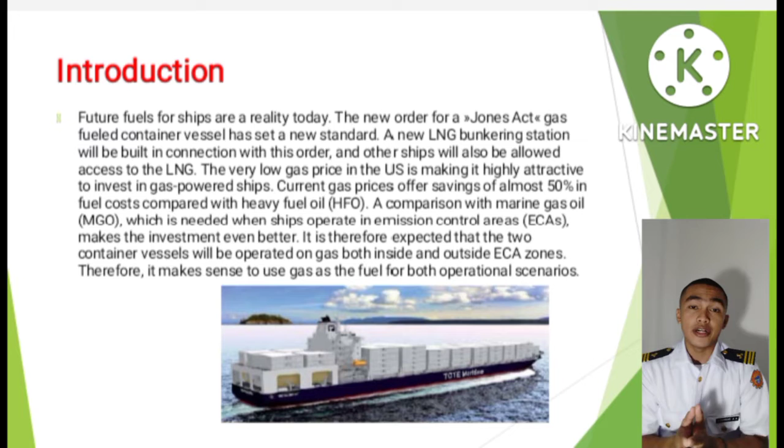So to conclude, it would make sense to use gas fuel in both operational scenarios. It minimizes operating costs with an upgraded MAN B&W ME-GI.

The upgraded MAN B&W ME-GI, as a two-stroke dual-fuel LNG engine, improves one of the industry's most trusted platforms to deliver even greater operational efficiency for large merchant marine vessels.

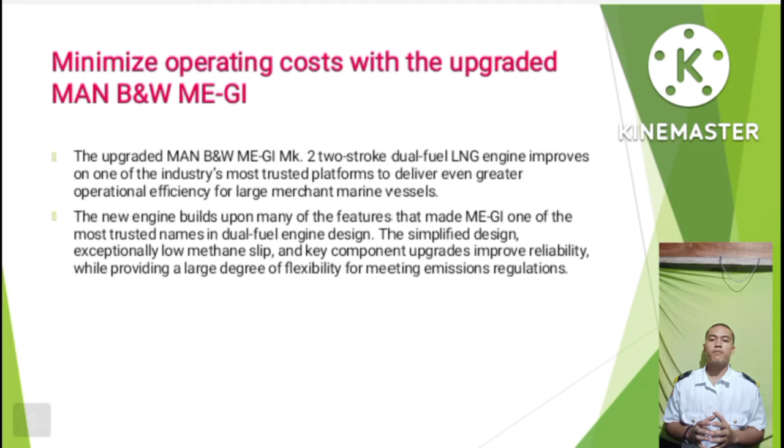The new engine builds upon many of the features that made the ME-GI one of the most trusted names in dual-fuel engine design. The simplified design, exceptionally low methane slip, and key component upgrades improve reliability while providing a large degree of flexibility for meeting emissions regulations.

Built for low OPEX operating expenses, so perfect for new builds or retrofits.

The MAN B&W ME-GI minimizes operating costs by delivering the same industry-leading thermal efficiency no matter which fuel you are using. This is a huge advantage, especially for container vessels in a market where fuel prices are fluctuating and LNG bunkering will become the norm.

Because of the MAN B&W ME-GI, capex is lowered as auxiliary equipment costs have been reduced. The engine's installation is also simplified.

In addition, key components have been updated to improve performance and deliver a more environmentally friendly solution.

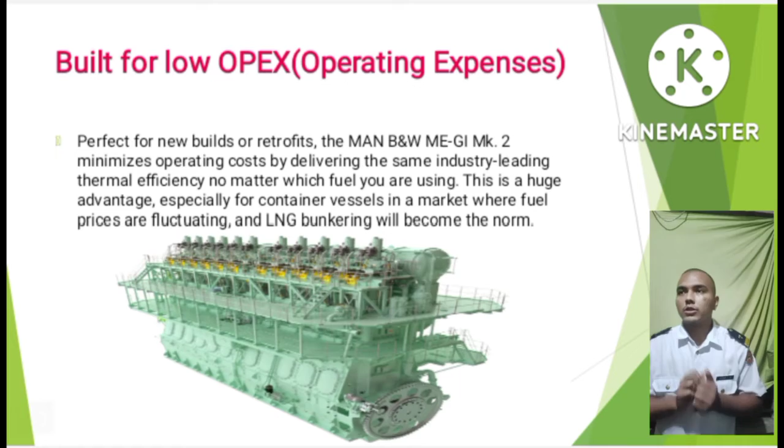Dual fuel operation requires the injection of both pilot fuel and gas fuel into the combustion chamber. So why dual fuel? This system ensures reliable ignition and outstanding combustion of gas and air mixtures with specific high performance. The gas is a low-cost fuel that ensures extremely efficient engine performance and also reduces nitrogen oxide emissions.

Different types of valves are used for this purpose. Two are fitted for gas injection and two for pilot fuel.

The auxiliary medium required for both fuel and gas operation is as follows. First, high pressure gas supply. Why do we need a high pressure gas supply in a dual injector system? The higher pressure allows an increase of the flow rate per unit area, thus permitting smaller and lighter injectors with faster actuation for enhanced injector shaping capabilities.

Next is the fuel oil supply, or the pilot oil. In the dual fuel combustion process, the ignition of the main fuel plays a crucial role in engine performance and emissions. In the present work, pilot fuel is used to ignite a gaseous methane air mixture.

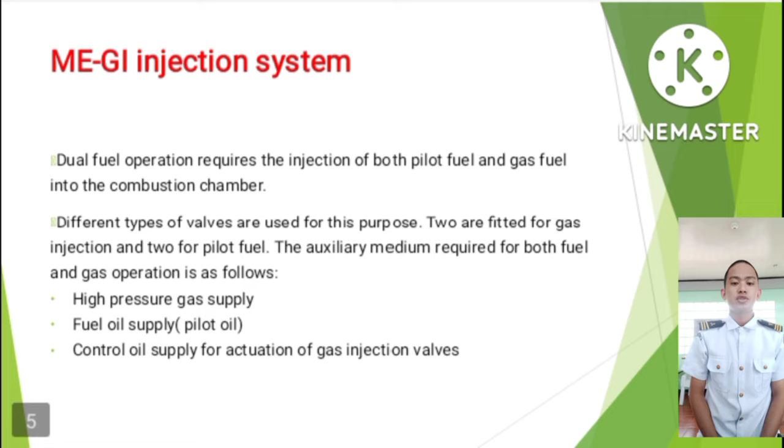The gas injection valve is shown in figure 8. This valve complies with traditional design principles of the compact design. Gas is admitted to the gas injection valve through bores in the cylinder cover.

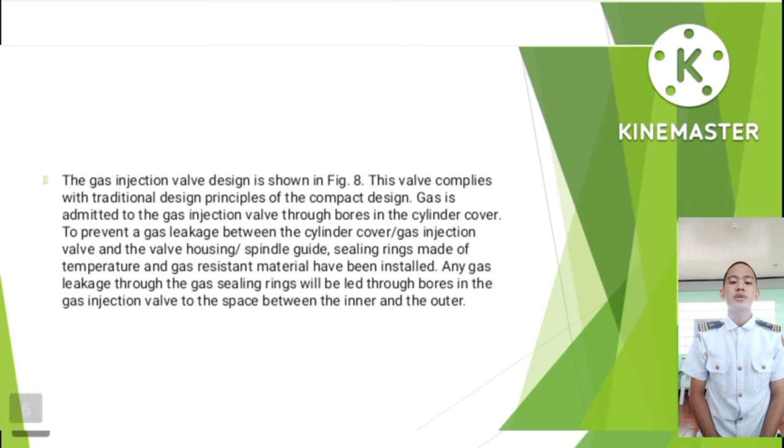To prevent gas leakage between the cylinder cover or gas injection valve and the valve housing or the spindle guide, sealing rings made of temperature and gas resistant material have been installed. Any gas leakage through the gas sealings will be led through bores in the gas injection valve to the space between the inner and outer. Next is the safety features.

The MAN B&W ME-GI engine is equipped with an additional safety system that ensures safe operation on gas without requiring a rupture disc in the scavenge air receiver, the exhaust gas receiver, and the exhaust gas piping.

Under normal operation, where no malfunctioning of the fuel oil valve is found, the gas valve is open at the correct crank angle position and gas is then injected.

The gas is supplied directly into an ongoing combustion. Consequently, the risk of having unburned gas that might slip past the piston ring and into the scavenge air receiver is considered to be unlikely. Monitoring of the scavenge air receiver pressure and the combustion condition also safeguards against such a situation.

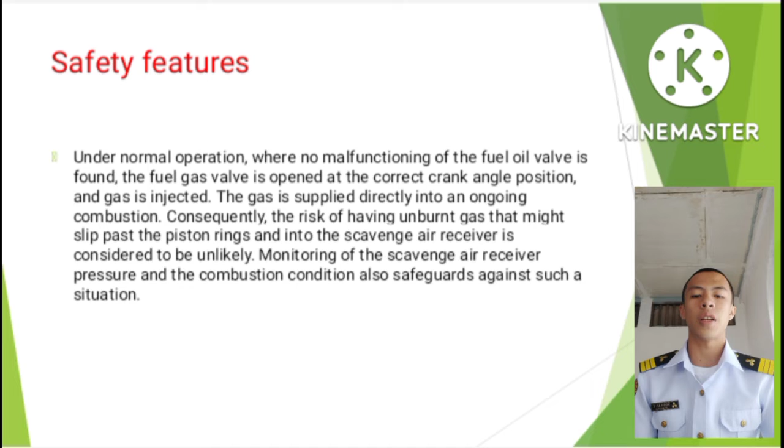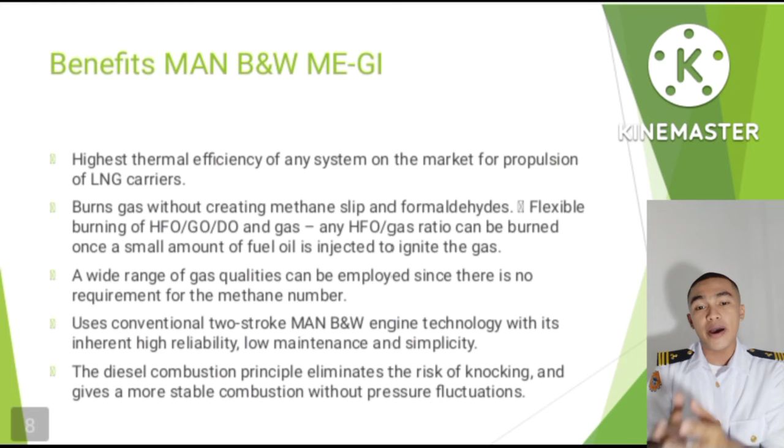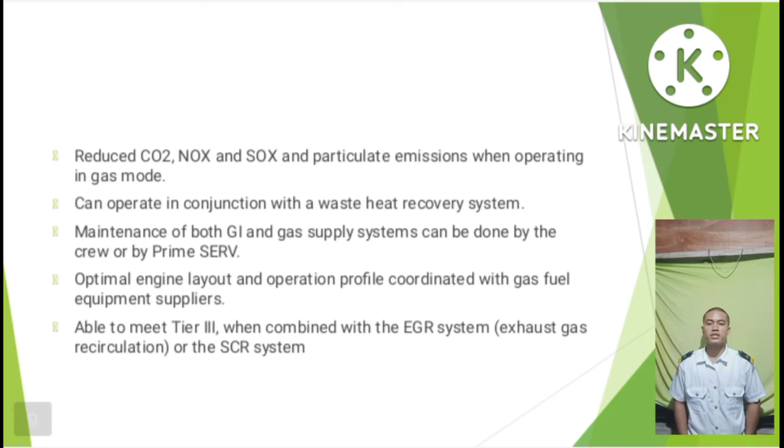Benefits of the MAN B&W ME-GI engine: it reduces CO2, NOx, SOx, and particulate emissions when operating in gas mode. It can operate in conjunction with a waste heat recovery system. Maintenance of both GI and gas supply systems can be done by the crew or PrimeServ. Optimal engine layout and operation profile are coordinated with gas fuel equipment suppliers, and it's able to meet Tier 3 when combined with the EGR system, exhaust gas recirculation, or the SCR system.

So introducing the upgraded MAN B&W ME-GI, a two-stroke dual fuel engine. This is the new MAN B&W ME-GI Mark 2 engine, a dual fuel gas optimized engine.

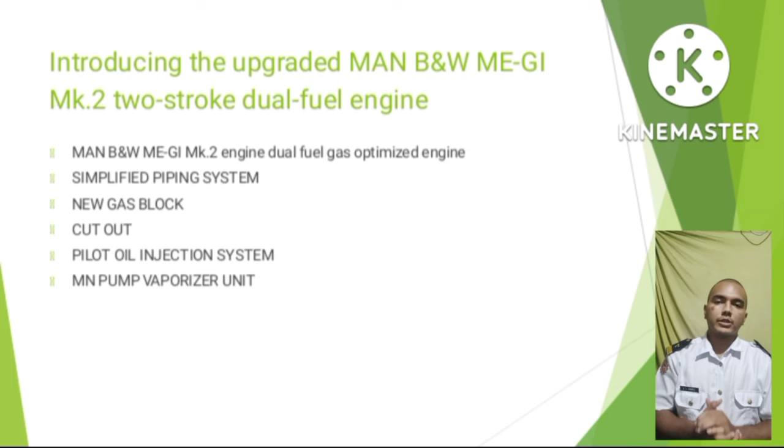Next is the simplified piping system, the new gas block, cutout, pilot oil injection system, and the MAN pump vaporizer unit. In these parts, we are going to explain and show the picture.

So the MAN B&W ME-GI engine is a dual fuel gas optimized engine. In that picture, it has an optimized engine that obtains considerable reduction of fuel consumption in gas mode by means of dual fuel gas optimization, like dedicated performance tuning, and this will be standard for the 70, 80, 90, and 95 bore versions.

So the upgraded MAN B&W ME-GI, the two-stroke dual fuel LNG engine, improves one of the industry's most trusted platforms, delivering even greater operational efficiency for large merchant marine vessels. The new engine builds upon many of the features that made the ME-GI one of the most trusted names in dual fuel engine design, including simplified design, exceptionally low methane slip, and key component upgrades that improve reliability, providing a large degree of flexibility for meeting emissions regulations.

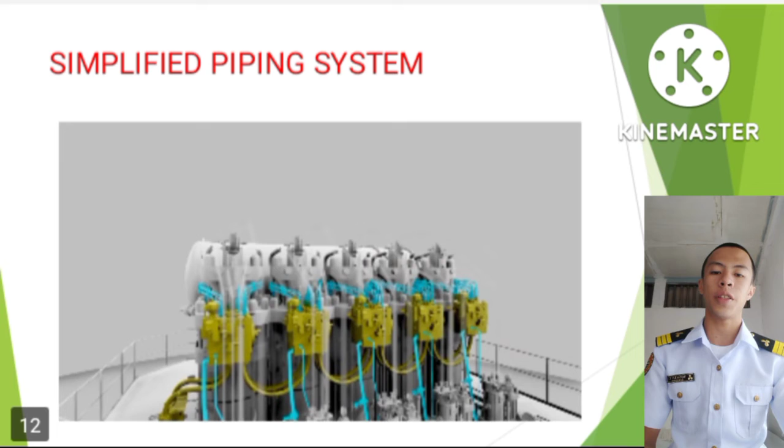So the next one is the simplified piping system. Simplified installation is achieved by removal of purge and blow-off valves and integration of sealing and hydraulic activation oil pipes in the cylinder cover. The gas chain pipes of the Mark 1 version are replaced by a one-way flow system for the gas.

Nitrogen purging function is enabled through a newly developed on-engine mounted nitrogen block. At the same time, the gas accumulator design has been further optimized to achieve a more compact solution with fewer components for the piping system, which also causes maintenance to be lowered.

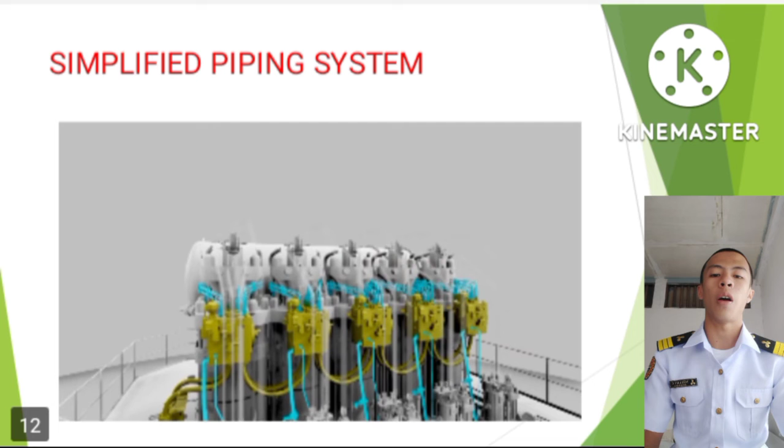The new gas block has brand new features for two-stroke dual fuel engines. The new MAN B&W ME-GI Mark 2 gas block design with improved window valves involves cutout of single cylinders operating on gas while allowing continued operation on fuel oil. That is the main purpose of the new gas block.

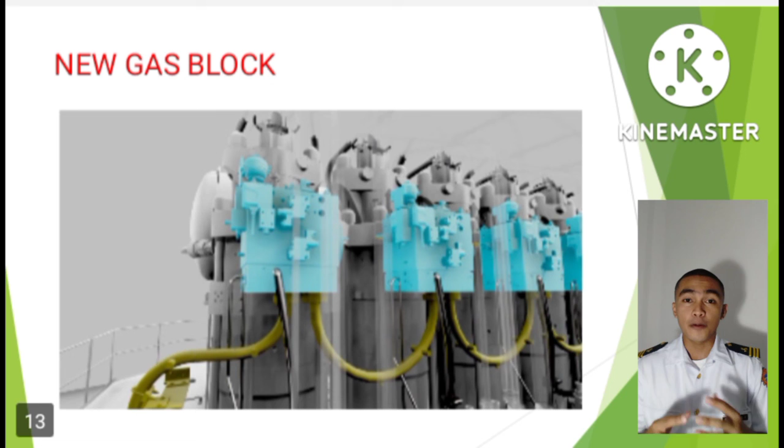I will discuss the upgraded MEGI, where the cutout feature also makes it possible to cut out a misfiring cylinder in case of, for example, failures on combustion chamber components, while still operating the remaining cylinders on gas, which will further improve gas availability for MEGI engines.

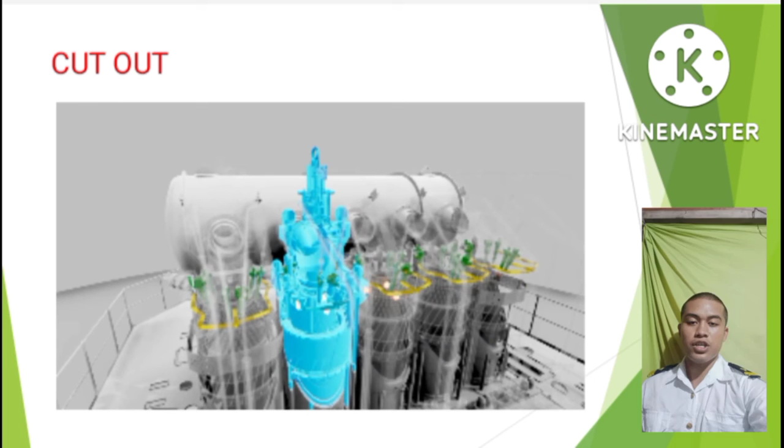How does a dual fuel engine work? In gas-run dual fuel applications, gas is injected into the engine via the inlet manifold. In order to ignite the gas, the ignition injector injects a small quantity of diesel or marine diesel oil into the compressed gas-air mixture, without the need or assistance of an electrical spark ignition.

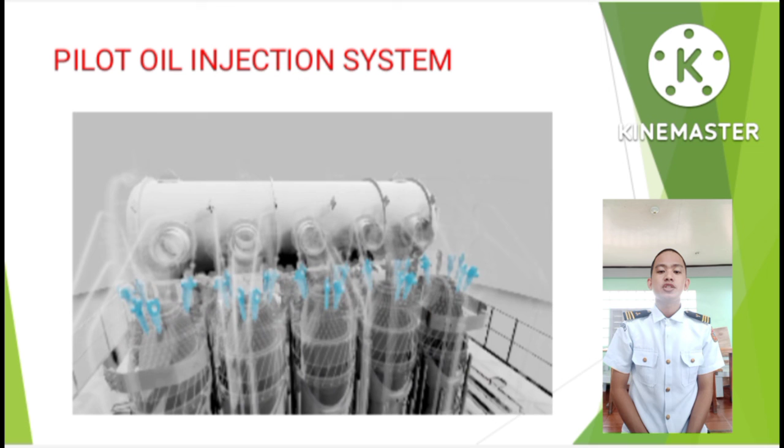When liquid fuels are used, the gas ignition injector is also used specifically to optimize the combustion sequence. The nozzle configuration is selected to match the delivery rate, spray form, and injection pressure.

The last one is the MAN pump vaporizer unit. It's a standardized, cost-efficient solution designed specifically for the MEGI engines. It features embedded redundancy, 3 times 50%, integration with the MEGI engine control system, and a friendly user interface. Its highly compact design reduces the unit's footprint and weight.